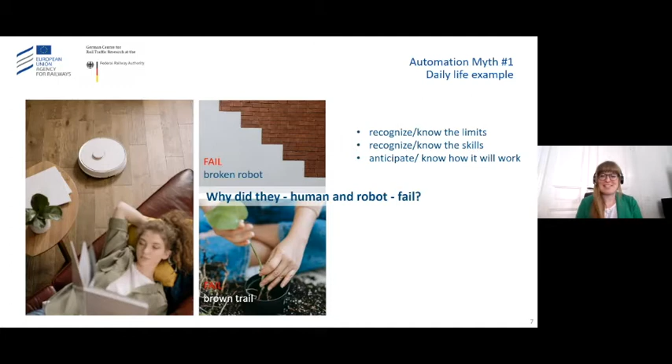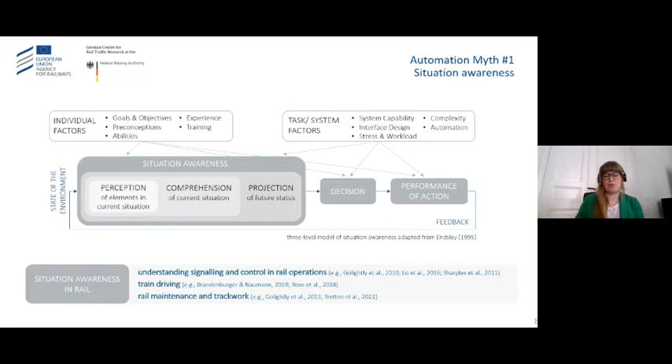This is relevant for understanding signaling and control in rail operations, in train driving, or also in rail maintenance track work. So it is a concept that is also relevant, definitely, for rail traffic.

Taking a closer look on the levels of automation, if we are familiar with rail traffic and automation on rail, then the grades of automation, the GOA, are quite familiar for you. The highest level would be GOA 4, unattended train operation. However, there exist far more differentiations of levels of automation.

One which is quite famous is the one of Sheridan, Verplank and Parasuraman, which developed different levels of automation related to human information processing. It has 10 steps or levels.

First, the system offers no assistance; the human must take all decisions and actions. For example, level 5 is the system executes suggestions if the human approves, and the highest level, 10, is that the system decides everything, acts autonomously, and ignores the human. So the human has nothing to do, cannot intervene, and we have quite a large differentiation there.

Moreover, information processing is not just seeing the information, it's much more. It's information acquisition, information analysis, decision and selection, and action implementation. We can have all these 10 levels for the different kinds of information processing. So a system might be quite highly automated in information acquisition, but have a low level of automation, for example, in action implementation. So automated systems can definitely vary.

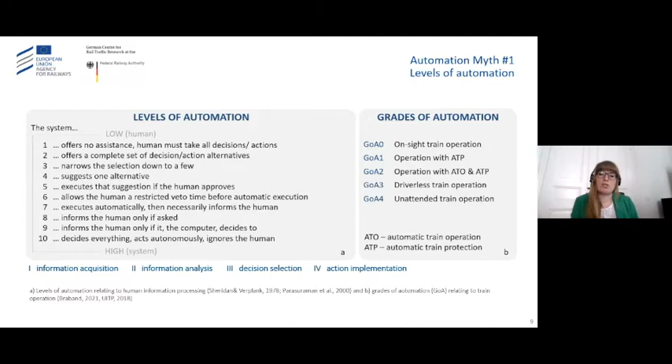As we know, it is important to have good situation awareness in order to have good decisions and good performance. But if you have a system which takes over a lot of aspects of information acquisition, it is harder for the human to perceive the relevant elements if there isn't some kind of interface that provides all the information the technology has to the human. The same goes for information analysis, which affects the comprehension and projection aspects of situational awareness. If it's taken over by the machine, it's really hard for the human to understand what is going on, what the machine is doing, if it is not displayed back to the human.

So automation definitely affects situation awareness, and we can also take a closer look on how it is affected, but this would be maybe a bit too deep for now.

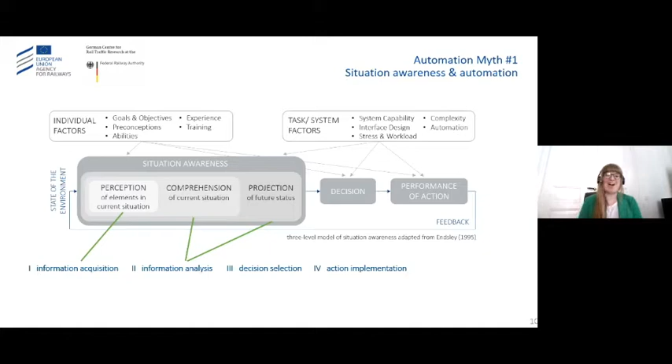Let's look at some examples that might give more insight. There already exist some good interfaces in railway, for example the DMI, the driver machine interface, which has been developed with human factors experts for the ETCS. What we can see here on the DMI is that it's used for GOA 2, so information acquisition and information analysis are supported.

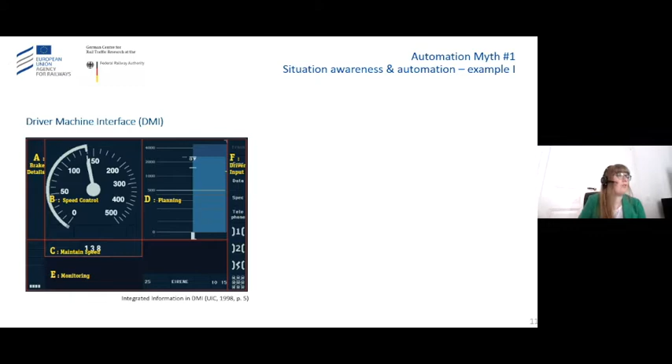Information acquisition because we get information like the speed, ceiling speed, but also the target speed. There we have the speed control. If you are over speed, there will be a little orange line shown to the drivers. You also have braking target points.

We have also further information, or a kind of automation of information analysis, because people get a braking curve. So if there will be a stopping point, shown in the planning part, then in the speed control there will be a kind of colored yellow line which shows how I have to reduce my speed in order to brake at this point. So this kind of braking curve.

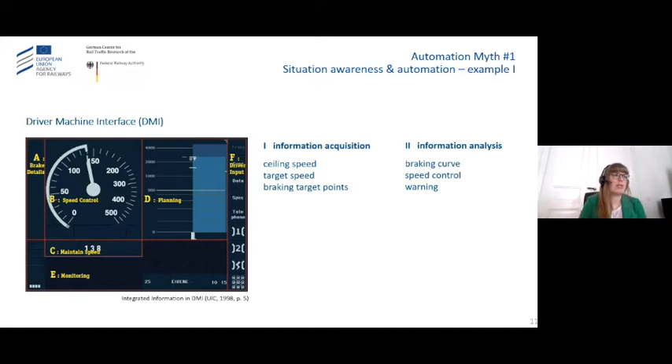We also have speed control and, of course, also a warning, which helps drivers to drive optimally. So what we can say is that the DMI supports this kind of anticipatory driving. It supports situation awareness. I get a lot of information here that I should otherwise have had to get out of the train, like all the signals, if I wouldn't have it here in the DMI. So this is quite nice.

But with a higher level of automation, it might also lead to a reduction in specific practical and theoretical knowledge of operators. Like, does the train driver then really know when he has to brake if he wouldn't have this support? So if he should then have to drive manually again, this would be maybe a bit harder for him.

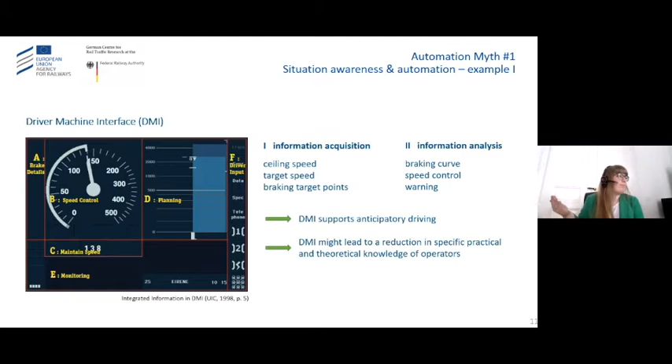Let's look at a second example. Of course, we also have higher levels of automation in railway: the automated metros, or driverless metros, with GOA 4.

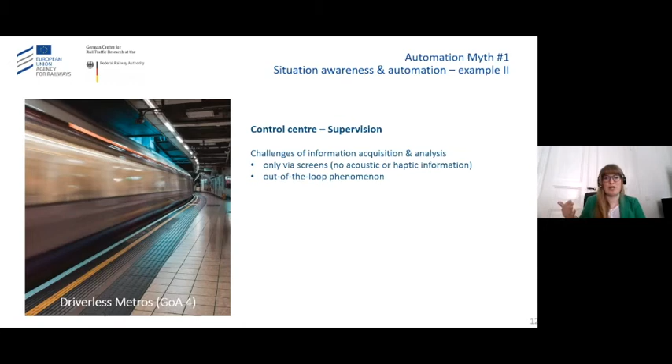And there we have some challenges of information acquisition and analysis in the control centre, where they are supervised. They only get information via screens, so they don't have acoustic or haptic information that a train driver maybe would have, but they maybe have also more sensor information, more screens, more details they could take a closer look at. But if there are troubles, we have the problem of the out-of-the-loop phenomenon, which is the major consequence of automation and leaves the operator a bit handicapped in their ability to take over manual operations, because there's a loss of skills or loss of situation awareness. It is really hard to keep the situation awareness, but it's really necessary in case there will be any troubles.

So my last slide, please. In order to have the operation as usual, we know that we need to have an adequate situation awareness, and this is changing with automation. So in order to enhance this, we need human-centered information and task design. We need training. We need to take the human in the focus. And this was also the last sentence in the paper: the key is putting people at the heart and not underestimating the complexity of human organizational factors that influence performance in a socio-technical system.

And this is what also the ERA wants, I think, with the HOF topic, and also we as the DZSF. And also I know my dear colleague Nils Brandenburger from the DLR—they are doing a lot of nice research on that. So I'm quite happy now to hand over to him. Thank you, and Nils, it's your turn now.

Yeah, thank you. Thanks a lot, everybody. And thanks, Christine, for the nice introduction and your interesting talk.

Please go one slide further already. That's exactly, here we are. That's about the second myth, actually. Yeah, and I'd like to take the opportunity here to walk you through the research we've been doing at the DLR in recent years that led us to the conclusion, or also empirically found the conclusion, that actually humans are at the heart also of automated railway operation. Next slide, please. I'd like to elaborate on this a little.

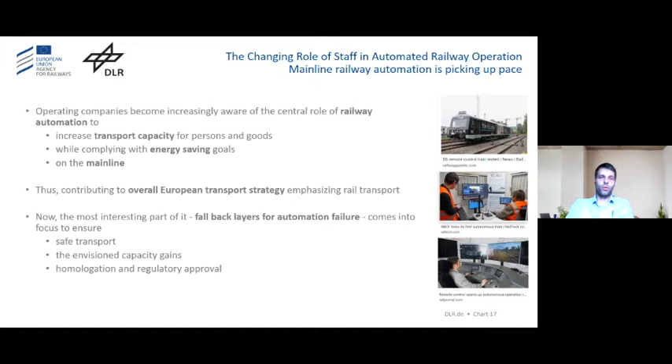Next slide, please. Traditionally, from a HOF perspective, because that's what we're talking about—taking the human organizational perspective—and Christine has already touched upon this, we think about, or you stumble across, the grades of automation taxonomy, which basically tells you, well, stepwise or subsequently, we are going to automate several tasks that are needed for railway service, subsequently from the human to the automation technology. And I'd like to phrase this a little sarcastically: until everything is done and we don't have to touch it again. Well, that would be nice, but is this really the way that is realistic, and also from a human and organizational point of view, the most desirable? Because we have to take a holistic approach here and consider a lot of factors. For example, we have to take the operational perspective and think about whether we are incorporating a swift mitigation process when we are automating from 0 to 100%.

Also, we have to take the economic perspective and think about: is this the best way of researching, developing and deploying automation technology from an economic return on investment point of view? Do we really have to go that far to 100%? Because obviously that impacts the funding.

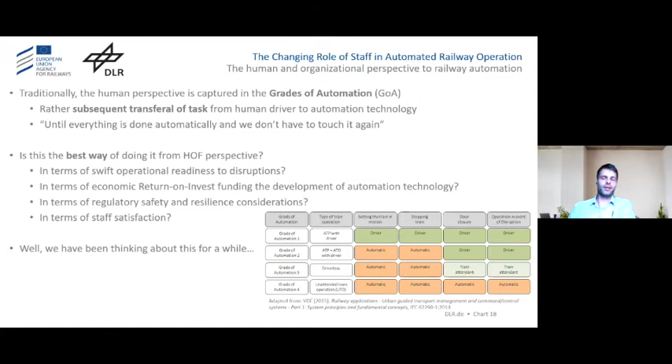And of course, human factors, human organizational factors. So task analysis: what kind of tasks are being done by the human, at which grade of automation, deducting user requirements, testing this, user performance metrics, fatigue metrics, workload metrics. All this is important in order to come up with workstation design, HMI design, what kind of information is being displayed, which also relates to the situational awareness topic we just had in the first talk.

Then also interaction analysis. The operating company is interacting with the infrastructure side, so you have all kinds of signaler-driver interaction. How does this develop in the future? How do they communicate? This touches upon the whole FRMCS topic, like what comes after GSM-R, and do we have enough broadband to go for remote control, link trains via video feeds and sending control commands over a wide physical gap, so to speak. These are interesting areas we are researching at the moment, which are also covered by current projects to come up with operational performance metrics.

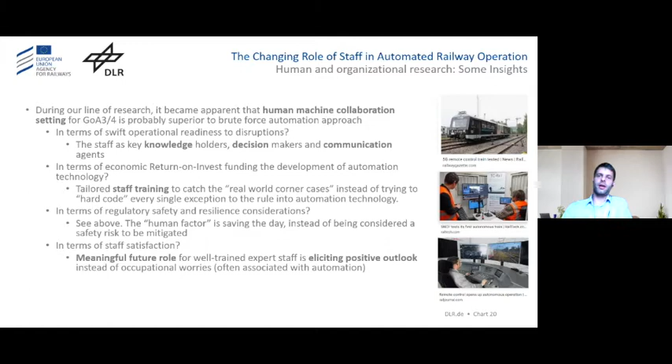So basically, considering everything I just mentioned, also in the graphical display, we came up with this vision: GoA 3/4 on the main line as a fallback layer, in routine operation it's automated, it works, that's nice. But then at some point, when it comes to the fallback layers, you should have a human remote control and recovery layer where disruptions can be mitigated by an expert team, situated physically distant but somehow centralized, in order to put the service back on track. So in case there's a problem, you should have a trained troubleshooting team ready to mitigate the problem. That's basically the definition of human-machine collaboration.

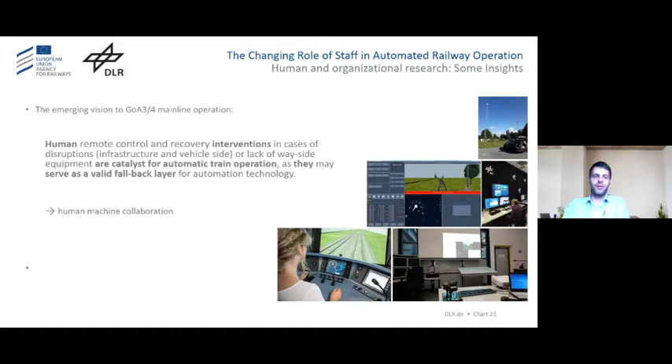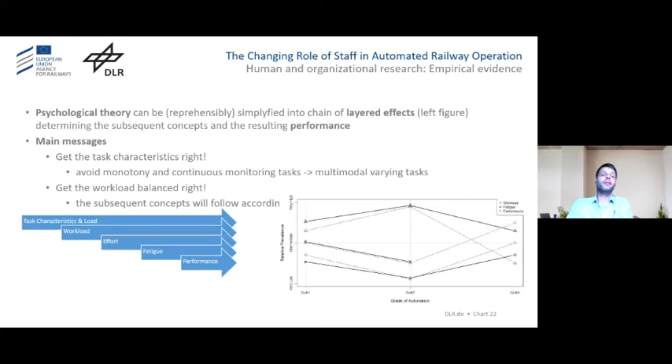So basically, in summary, I think taking into account the human and organizational factors enabled us to come up with a holistic vision for how GoA3/4 service could actually work, taking into account more and more issues from the operational, economic, and approval context, incorporating this into one evolving vision on how the service can be safe, efficient, and satisfying for the staff involved.

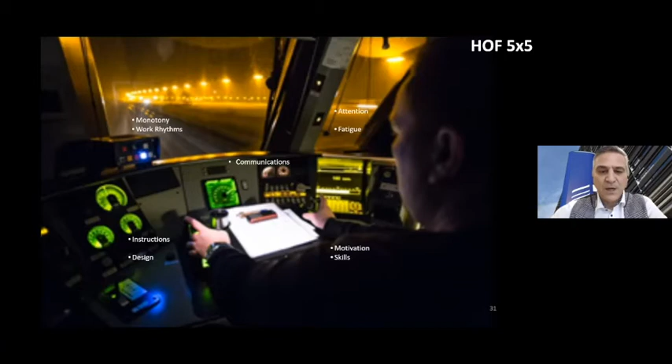You can see here in the environment, but there are also unseen things. You can see some devices, and this is also very important to take care about the design of things. Last but not least, you have also some communications which are really important, the key messages shared between operators and traffic control room, for example, and train drivers and so on.

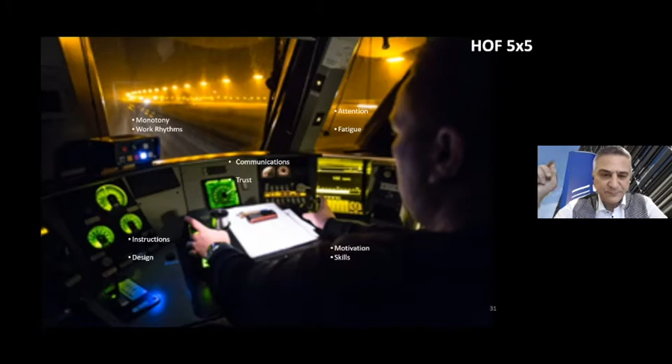You have also the trust, which is also very important to make a rise between workers and the whole system. As you can see, there are plenty of factors, and we have attempted to stabilize a set of factors based on the work of Kyriakidis, for example, or the HFAX, a series of handbooks, and we have stabilized two axes. As you can see now, you have a dynamic part opposed to the static part, and you have also on the left situational part, and on the right the staff part.

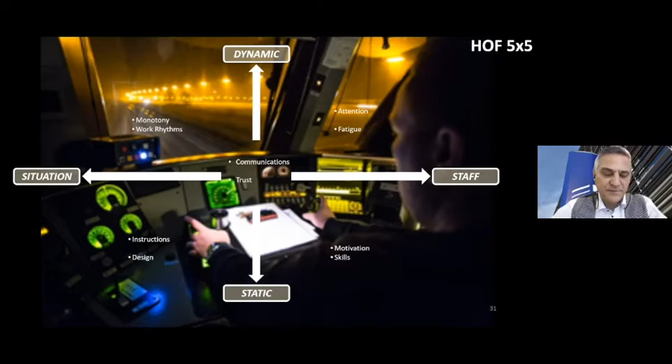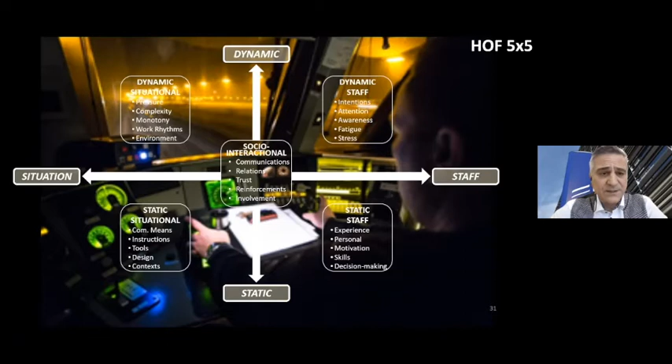And if you consider this as 5 categories, you will have those names, for example. So you have on the top left the dynamic situational categories, and you have shortlisted some factors most commonly found within railway accidents, for example, about pressure, complexity, monotony, work rhythms, environments. You have also on the top right the dynamic part concerning staff, so with intentions, attention, awareness, fatigue, stress.

The bottom right, always still concerning staff, you have the static part: experience, personal, motivation, skills, decision making. And you have also on the bottom left, static situational, with communication means, instructions, tools, design, context. And at the very center, being all static dynamics based on the situation but also on staff, of course, you have the socio-interactional factors made with communications, relation, trust, reinforcement, involvement.

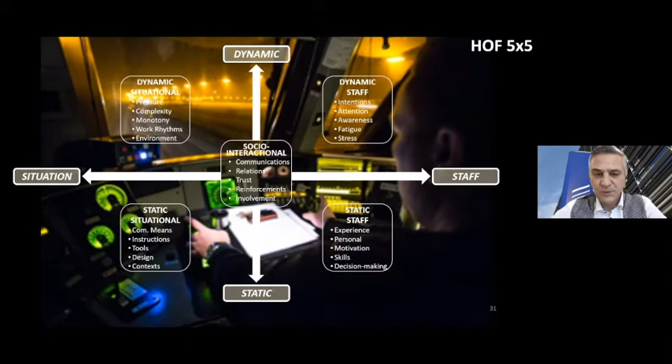So we have not only listed those factors, we have also emphasized those interactions, and those interactions are exemplified by this slide with creating or updating procedures. For example, thanks to those categories, you can visualize and anticipate and, of course, raise questions about those interactions.

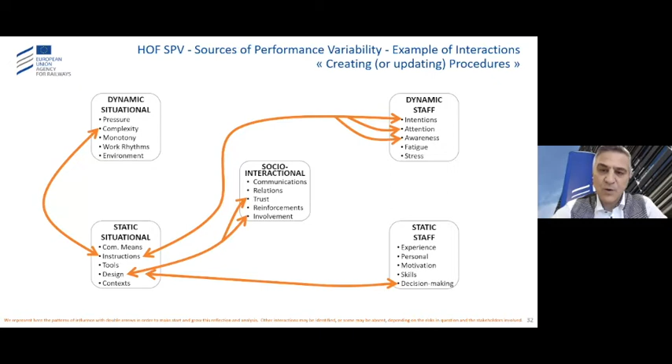So, for example, starting with instructions revised, you will make the links towards intentions, explaining how errors can arise, for example, applying those instructions or the steps during instructions, making some shortcut to avoid errors, or which kind of points you should pay more attention to, being aware of something else.

This is also normally for the designer of the instructions to pay attention to the complexity. Is those instructions reducing complexity or increasing complexity? The design should also include some steps to involve end users, and this will emphasize and make trust even higher. And of course, design should also leave clear decision-making steps for the users.

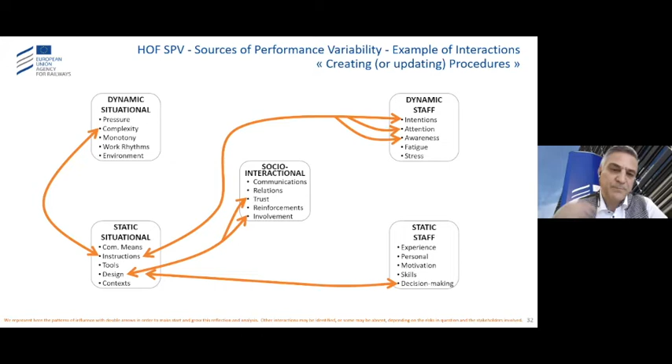So last but not least, for each of these factors, we have, with the task force, also designed this tool, preparing some basic questions for each factor. So each 5 by 5, for each of the 25 factors, we have a series of questions prepared to let the group or the individual working on this risk assessment dedicated to this change ask those questions and search for answers. And this is it.

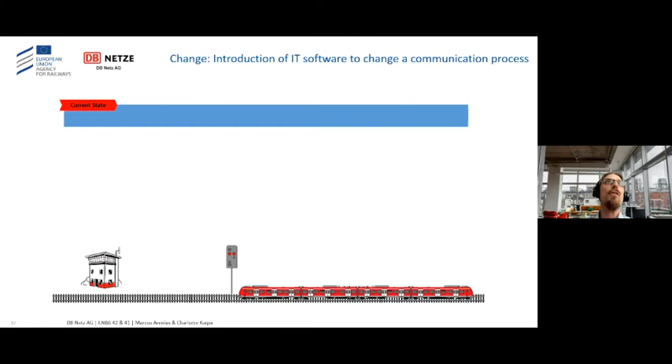Okay, you can move through the current state quite quickly. So what is the change we considered for the toolkit? This change consists of the introduction of a new IT software to change a communication process. So the current state looks as follows.

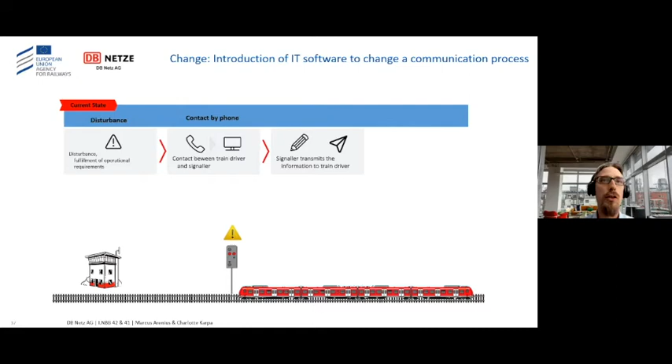Just press the buttons. If there is a disturbance, for instance a faulty signal, then after fulfillment of the operational requirements, a command can be sent to the train driver. For this to happen, the signaler contacts the train driver via telephone to communicate the intention, and then transmits the relevant information for the command, such as the location of the train, which kind of command should be used, and its content. This is dictated verbally.

The train driver then receives this information and verbally repeats it in order to ensure a correct understanding, so that the command is confirmed as correct.

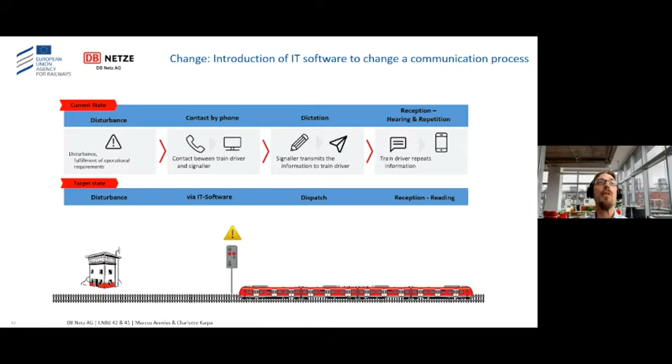So what will be changed? The target state currently envisioned, still in a very early phase of the change, is that the train driver is informed a command is coming via software. The information that in the current state is dictated verbally would instead be received via an app, and the train driver checks the app, reviews the command information, and confirms it is correct.

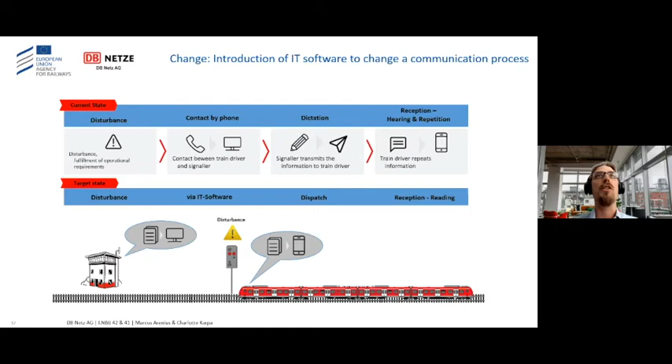Okay, next slide please. So this was the change we applied the toolkit and methodology to. We had two sessions of two hours each in which we applied the toolkit. The participants consisted of one project manager, one user expert, and a moderator.

For this test, it was very important to us that the moderator should not have very deep expert understanding of HOF subjects and topics, in order to ensure that the toolkit can also be used by users who do not have very deep HOF knowledge.

So what were the existing strengths of the application of this tool? The participants greatly appreciated the questions detailing the 5x5 factors presented earlier. For every factor, like for instance fatigue, there are different questions that detail what fatigue means and how it could affect the change. This was very much appreciated, especially since the general description of the factors, although good for HOF experts, requires more guiding for non-HOF experts to reach the right question - especially true for softer and organizational factors.